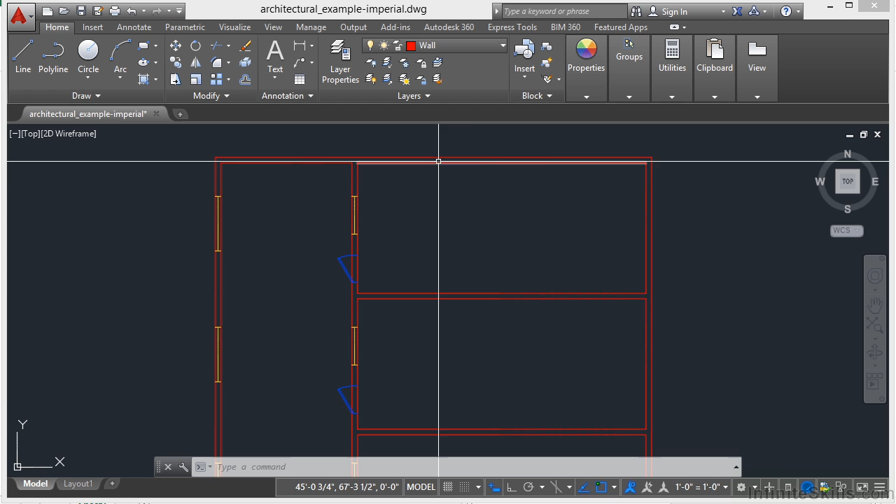In this file, we have a layer for the walls, a layer for the windows, and a layer for the doors. You can see they're all different colors here. That's just there to help you distinguish between the line work so you can know what is what. These are the layers here. They control the line type and the color of our objects.

By creating layers, you can associate similar types of objects by assigning them to the same layer, as was done in this example. With layers, you can then control the following. You can control whether objects on a layer are visible in any viewport. You can control whether and how objects are printed. You can control what color is assigned to all of the objects on a layer.

You can control what default line type and line weight are assigned to all of the objects on that layer. You can also control whether objects on a layer can be modified. You can lock down your line work that way. You can also control whether objects display with different layer properties in individual layout viewports.

Now, a few basic things about layers. Every drawing includes a layer named 0. If I open up the Layer Properties Manager, I click on this button right here, or I can type in LA on the command line. Now, the Layer Properties Manager is a palette, so you can move it around and do things with it, just like any other palette. Every drawing has a layer named 0, just like this one right here.

Layer 0 cannot be deleted or renamed. This layer has two purposes in a file. One, it ensures that every drawing includes at least one layer. And two, it provides a special layer that relates to controlling colors and blocks. We'll talk about that at another time.

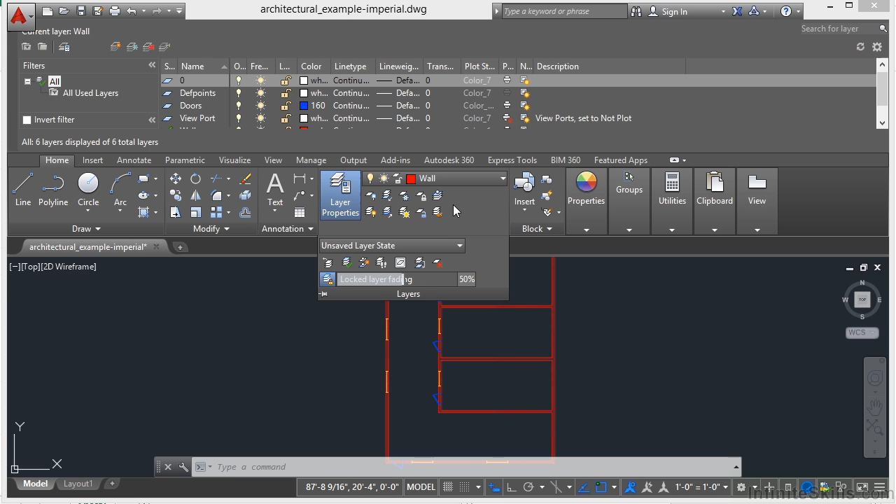But here is the Layers panel for your ribbon. You'll get to a lot of different controls from it here. If you click this Layer Properties button, that will open or close the Layer Manager. If you select on this bar here, you will get to the different layers in your file. If you select one, it will become the current layer. Whatever layer is current, that's what your new objects will be drawn on.

So this object was just drawn on the viewport layer. You can switch to the doors layer. And now when I draw an object, it's blue because it's on the doors layer. I have different buttons here. I can isolate my different objects and freeze some of my layers.

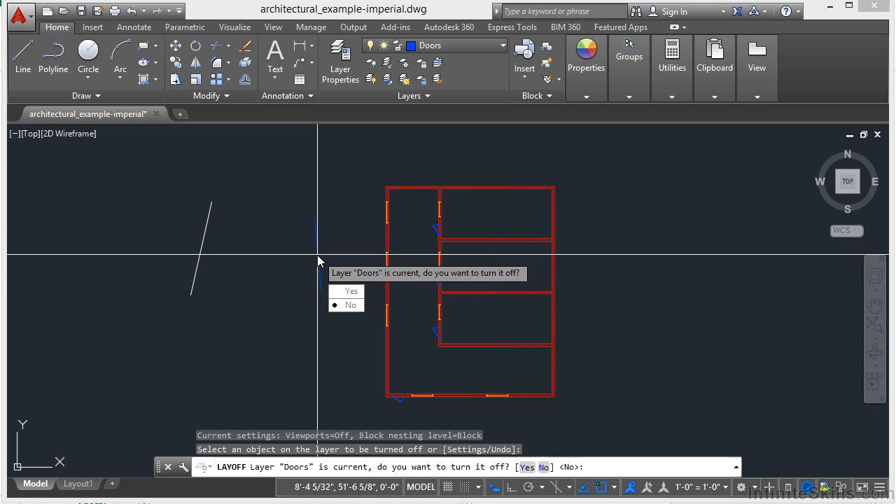So if I click the off button, I can turn off all of the doors. Now they're still in my file. They're just sort of off. I can't see them. That way I won't accidentally delete them or manipulate them, and it gets them out of the way. I can turn them back on by clicking on the Turn All Layers On button here. So this is off, and then this is freeze.

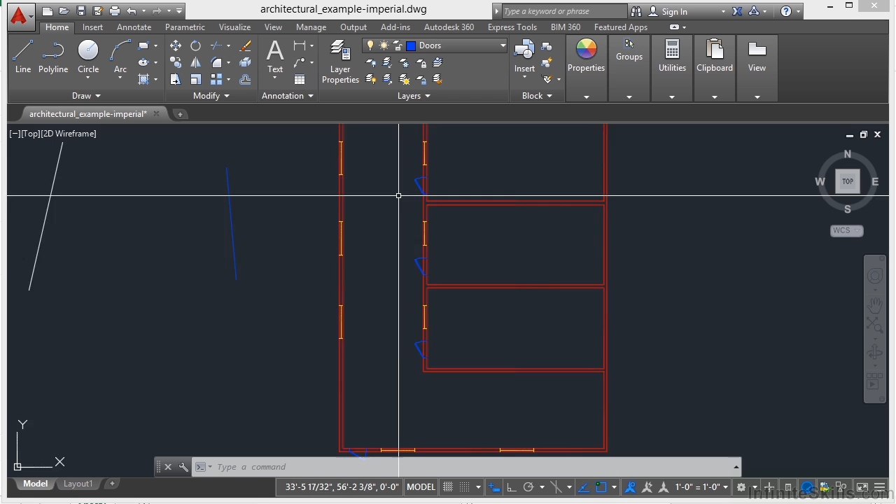We'll talk a little bit more in depth about the differences between turning off a layer and freezing a layer. But you can do that to help you work with your line work while other objects are out of the way. That way you won't accidentally delete them or modify them, and it makes things easier when there's less on your screen.

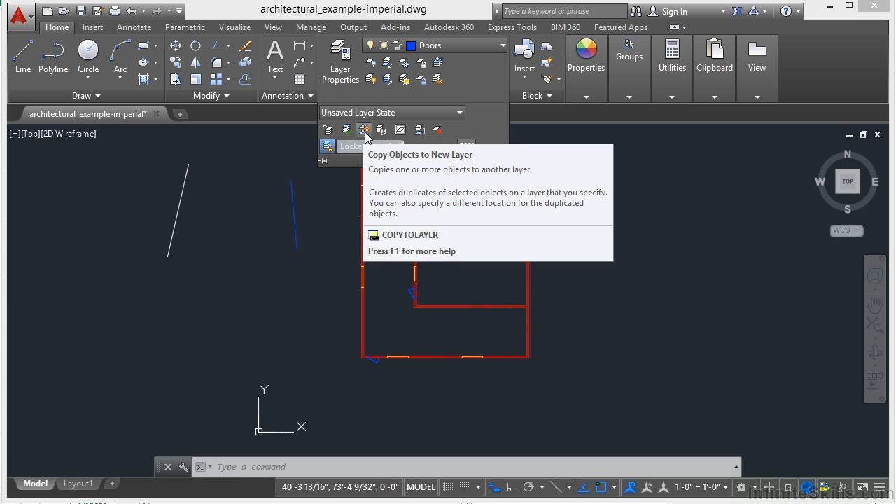This little button here, the triangle, brings down some other settings that are a little bit more advanced. You can copy objects to a new layer. You can do the layer walk, which will display your objects on specific layers for you. You can freeze layers. You can merge layers so that you move all the objects from one layer to another and it gets rid of that layer for you. It helps you clean up your drawing. And this will delete all the objects on a specific layer.